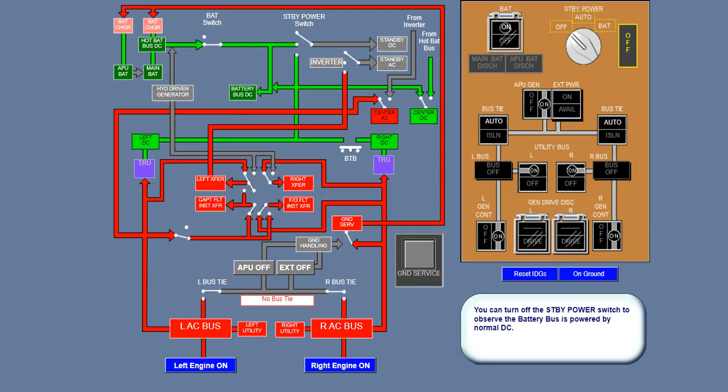In case of a complete failure of the AC generating system, including the hydraulic-driven generator, the aircraft electrical system is reduced to the aircraft battery for its sole electrical power source. This battery standby power system includes 4 electrical buses and an inverter that converts DC power to AC power for the standby AC bus.

The battery standby power system includes these 4 buses: hot battery bus, battery bus, standby DC bus, standby AC bus. Let's now describe the purpose of these buses.

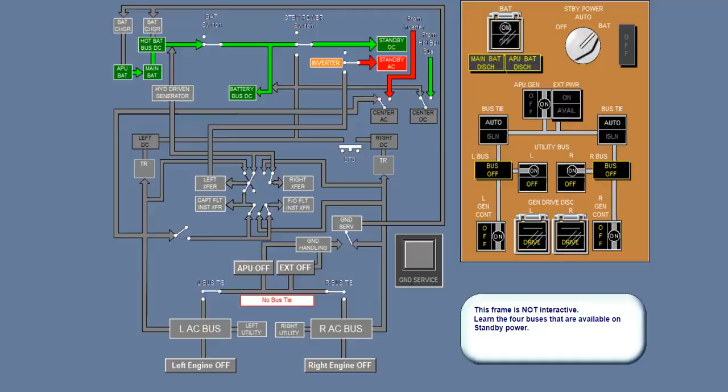The hot battery bus supplies power to the systems that need continuous electrical power. Items that are powered by this bus are fire extinguishers and the fire extinguishing electrical power, SPAR and APU fuel valves, IRS emergency power, left and center continuous, right for 5 minutes only, RAT manual deployment, clock time reference.

Before APU, external, or engine generator power becomes available, the battery is the power source for the hot battery bus. With APU, external, or engine generator power available, the battery charger is the hot battery bus power source.

Before generator electrical power is available, the battery bus can be powered by the hot battery bus through the battery switch-operated battery switch relay. With the battery bus connected to the hot battery bus, the battery discharge light illuminates, indicating that the relay is closed.

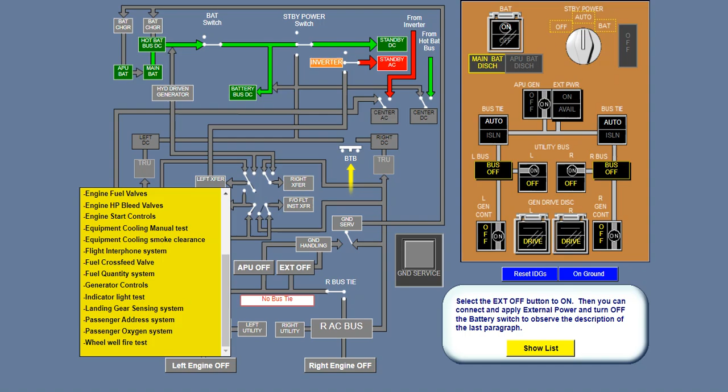Before generator electrical power is established, the standby DC bus is powered by the aircraft battery through the standby power switch, auto or battery position. Some of the important items powered by this bus are standby attitude indicator, left VHF communication system, manual cabin pressurization system, bleed air isolation valve.

After generator electrical power is established, the left DC bus is the principal power source for the standby DC bus, with the main battery operating as a backup power source. If the standby DC bus should lose power, the standby power off light illuminates, and EICAS displays the advisory message of standby bus off.

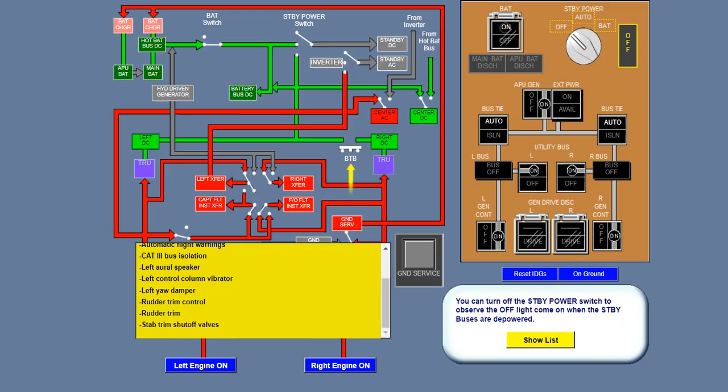Before generator electrical power is established, this bus too is powered by the aircraft battery and the standby inverter through the standby power switch auto or battery position. Some of the important items powered by this bus are left VOR receiver, left ADF, RDMI, center ILS receiver,

main instrument panel floodlights. After generator electrical power is established, the left AC system through the left AC transfer bus powers the standby AC bus. If the standby AC bus should lose power, the standby bus off light illuminates and EICAS indicates an advisory message of standby bus off.

Checking the battery standby power system. The entire battery standby power system can be checked by turning the standby power selector to battery. The battery position isolates the system from the battery charger, making it entirely dependent on the battery for electrical power. Consequently, the battery discharge light illuminates. The standby power off light should remain out when the battery is selected, since the standby buses should be powered.